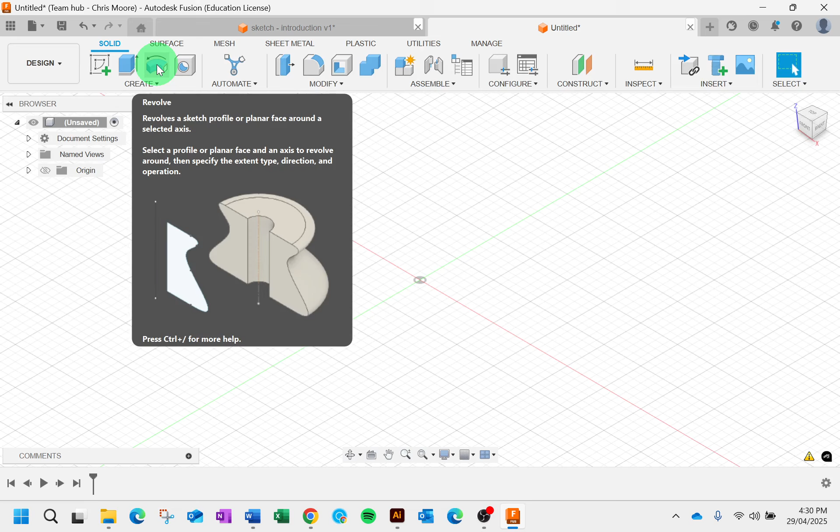Welcome, this video is going to introduce you to the sketch space in Fusion. Sketches are the foundations of 3D modeling in Fusion, where 3D forms like this extrude and the revolve begin with a basic shape as shown in the description.

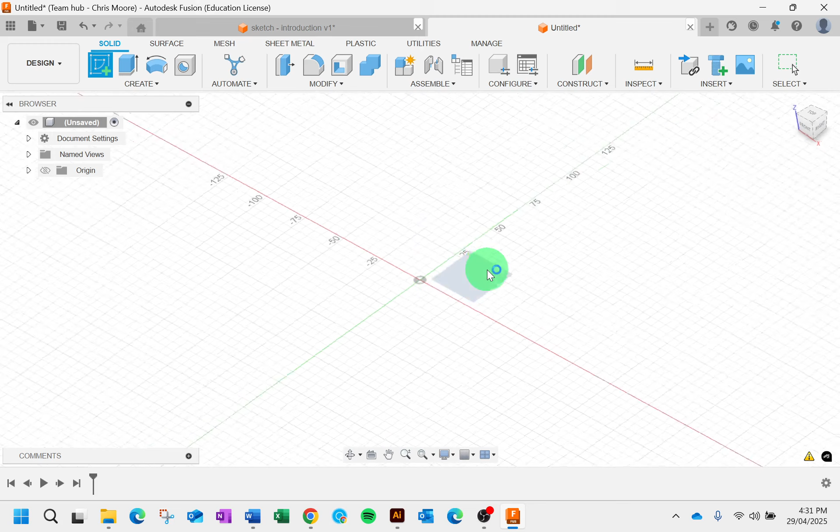To get started, we're going to go to Create and create a sketch. Now we want to specify what origin or ground plane we want to be working on. Is it this front wall, the side wall, or the ground plane? In this case, let's select the ground plane. Now we can see our view has changed and we're looking down upon the document.

Now the tools we're going to be going through and exploring are available in this document, which is available in the video description, and we're going to be drawing them just to the left-hand side of those descriptions.

So to get started, I'm going to zoom in on the line tool. To enter my initial sketch down the feature tree, so I'm continuing to work on that sketch, I'm just going to right-click and then go Edit Sketch. Notice we now are in that sketch space where all these are 2D shapes compared to those 3D forms within the solid space. So going back to sketch.

Lines simply draw straight lines whereby we can go to Create, then Line, and specify our different lines. So the starting point and the end point. If we wish to not continue, just press Enter.

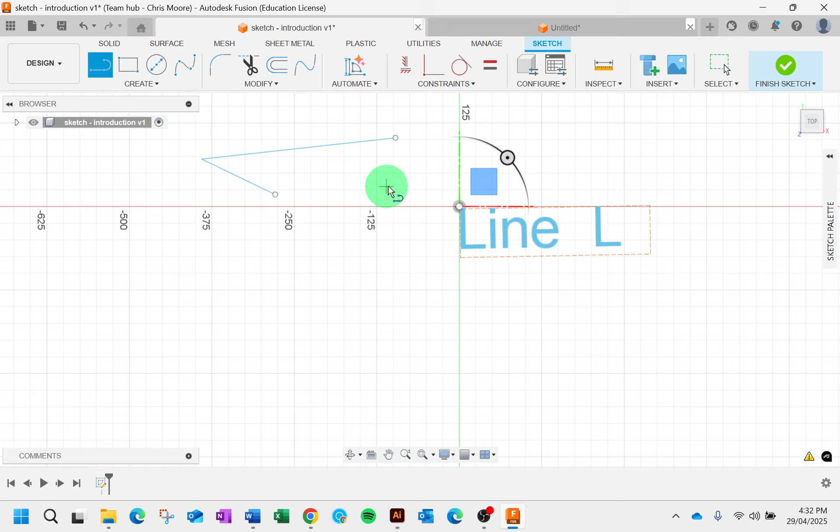We can also create shapes by using a number of lines. Hovering back over the start, it will shade in a light blue to specify it is enclosed. You can also create arcs if you hold down the click and drag to define an arc.

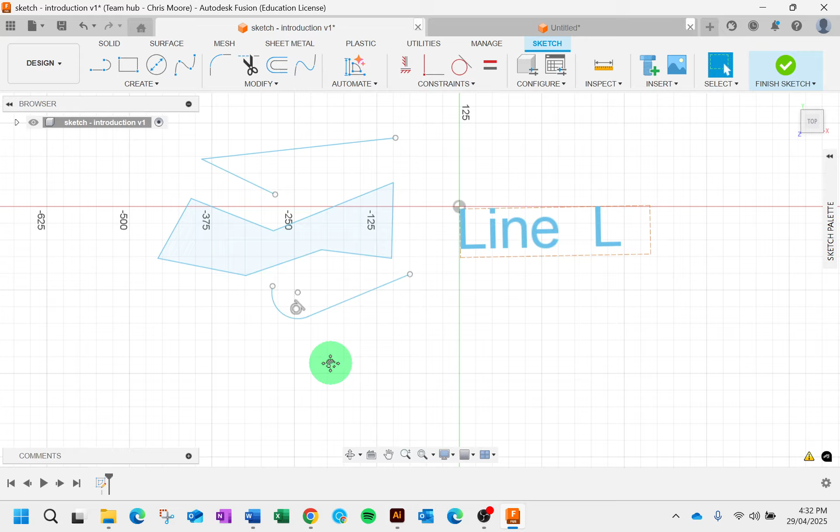Moving down is a 2-point rectangle, and the hotkey is R. Otherwise, it's available in Create, Rectangle, 2-Point Rectangle, and you're specifying the length and width, so your starting point and the end point.

Next is center rectangle. So under Create, Rectangle, Center Rectangle, and here we're specifying the center of it and then defining the length and width.

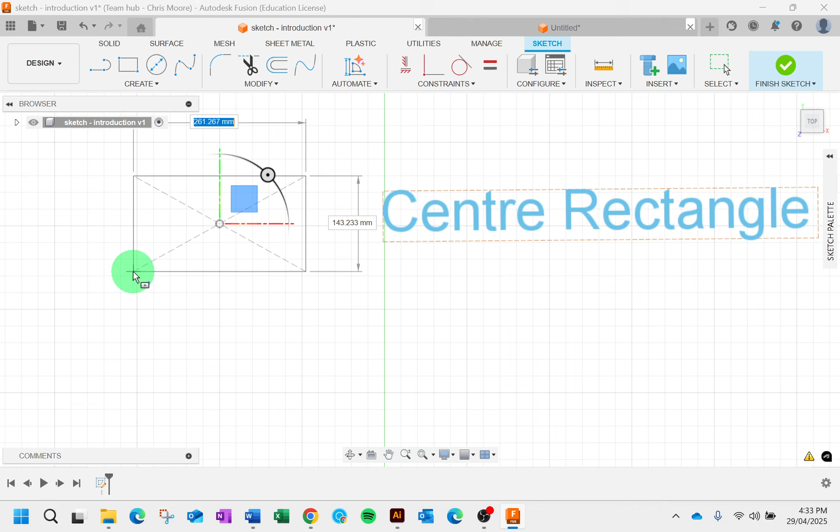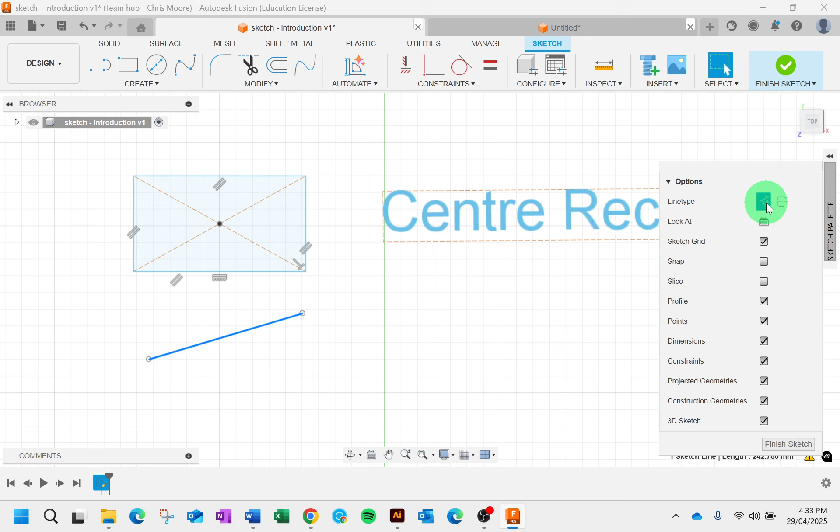Notice it's created these dashed brown lines. These are referred to as construction lines. We can turn any line into a construction line by selecting the line we've created and going up to Sketch Palette, then turning on construction line. Construction lines are guides that don't form any part of the model, and we can change that back by going into our sketch palette and changing it back to form a path.

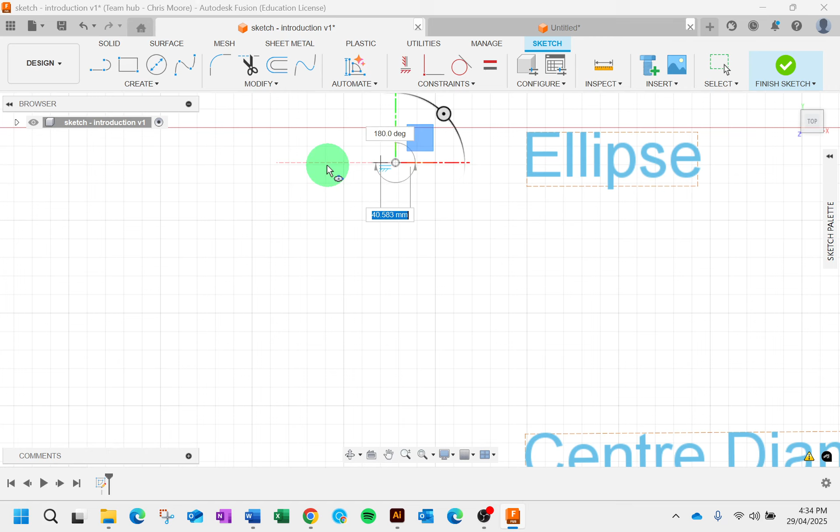We should then be able to drag up to the right and come to an ellipse. So ellipses are defined by the radius and then the depth.

Center diameter circle, under Create, Circle, Center Diameter Circle, and then specifying that diameter. 2-point circle, the top and the bottom point of that circle.

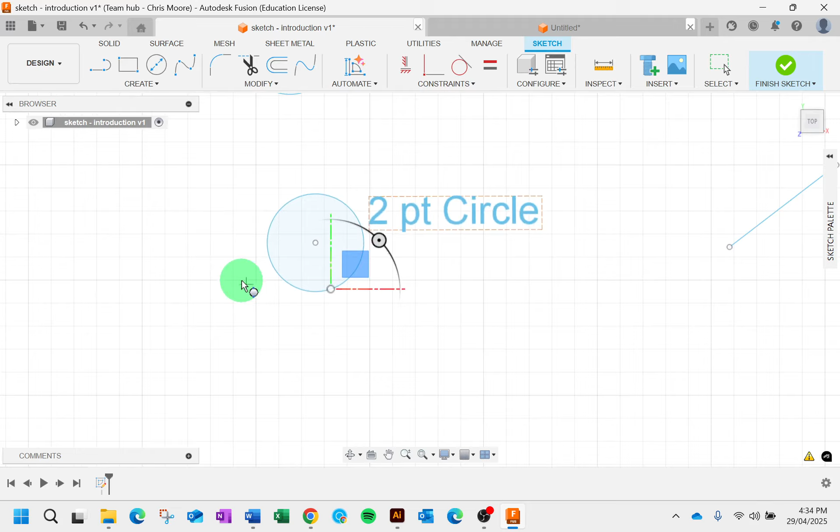Now I'm just going to zoom out to show what we've gone through and been creating. With selecting in Fusion, you can be selecting a path, you can be selecting a shape, or you can be selecting multiple by holding down Shift.

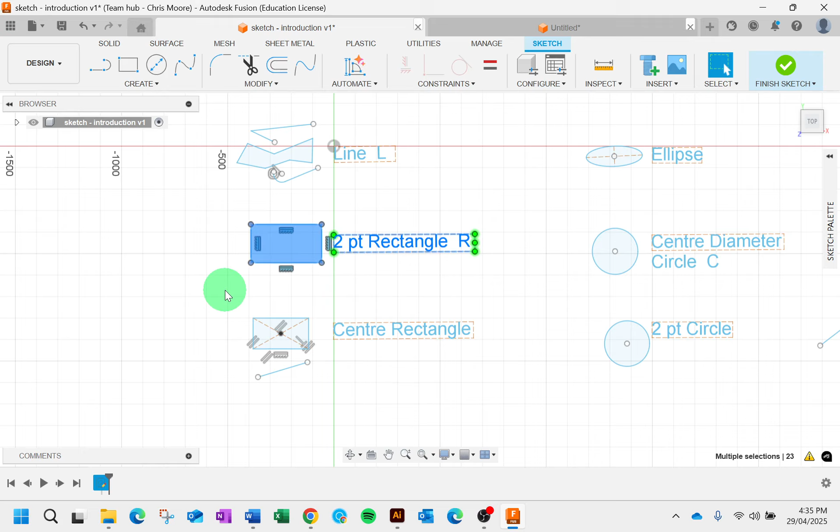Other interesting things with selecting in Fusion: if I click and drag to the left, it's different than if I click and drag to the right, obviously the colors. So if I click and drag to the left, it's going to be selecting everything that it touches, whereas if I click and drag to the right, it's only going to be selecting everything that's fully enclosed.

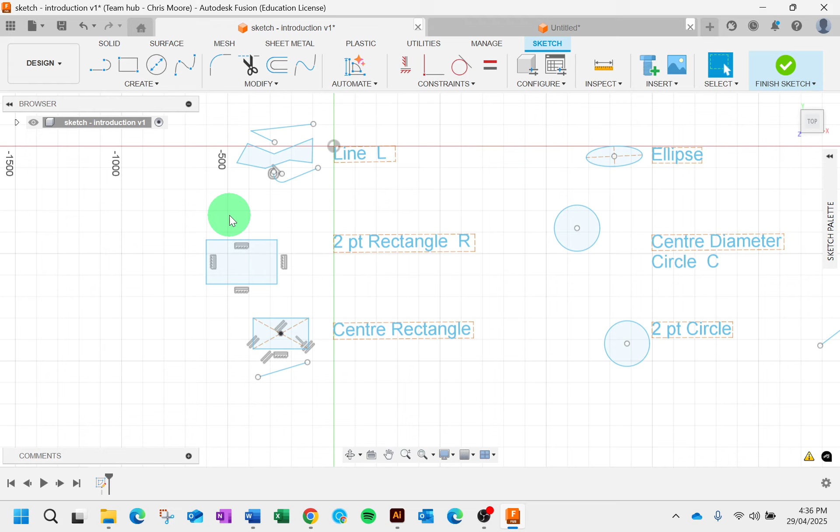Moving objects, you can select it and generally move it from, if it's a whole shape, the midpoint, especially if it's a circle, from the midpoint, and other shapes, having it fully selected so you can go through and move a design.

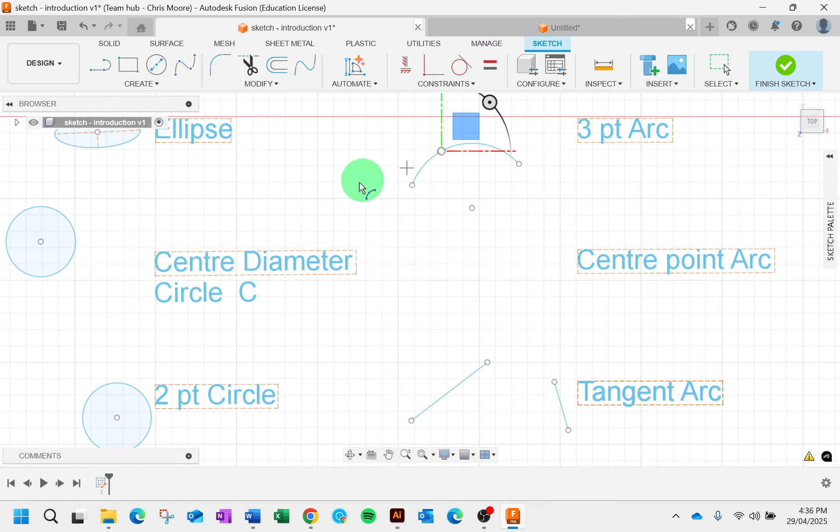Lastly, 3-point arc. Specifying this: Create Arc, 3-Point Arc, the radius, and then the intensity of the arc. Center point arc: first point, second point, and then the angle of the arc.

Tangential arc, or a tangent arc, you're going to need to have 2 paths first of all, then go to Arc and Tangent and select the first point and the second point. That creates a smooth transition between those 2 lines.

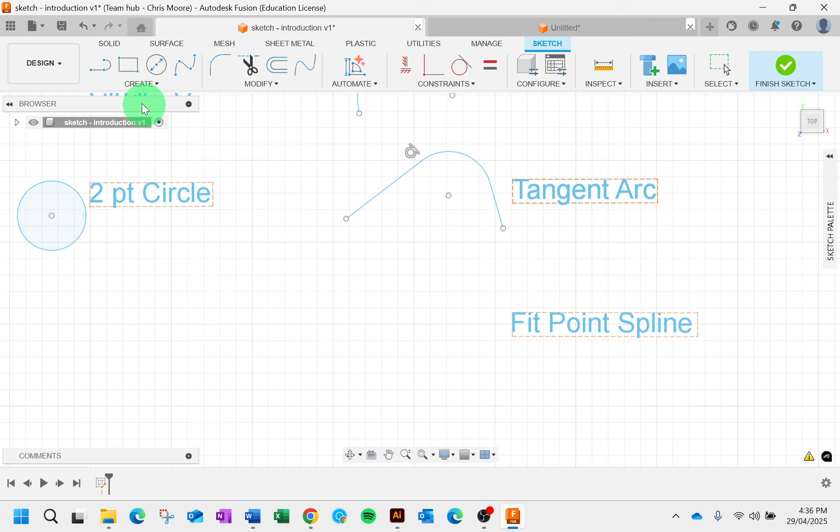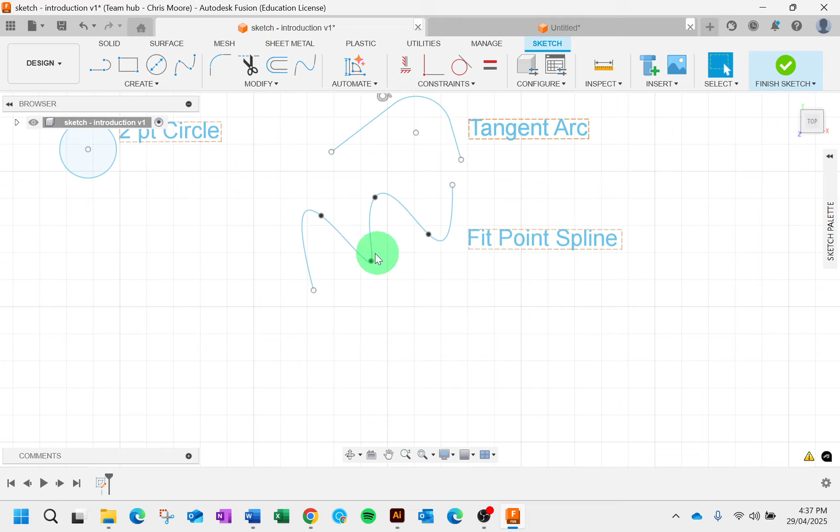Fit point spline, under Create and Splines, then Fit Point Spline. This works similar to that of the pen tool in Illustrator, where we can go through and create our spline and then use the handles to change the intensity of the arc and the positioning of those curves. By mastering these sketch tools, you'll be able to build a strong foundation when 3D modeling.